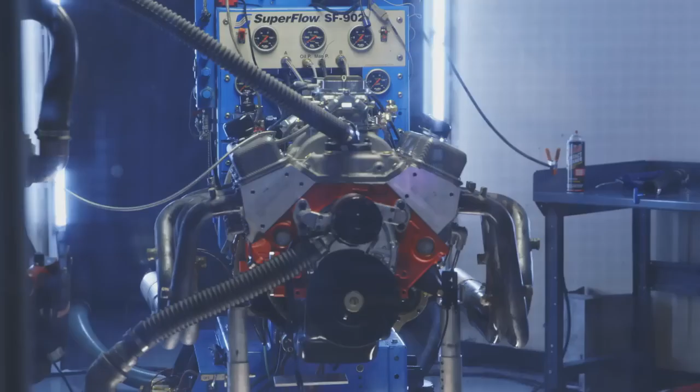We are going full Bill Nye Science Guy. You see, here's what we've noticed in all our dyno testing. When you raise an engine's coolant temperature, it kills horsepower. And you may wonder why. We certainly did, and we think it's not the reason that you probably suspect, and that's what we're gonna find out here. So that'll be test one.

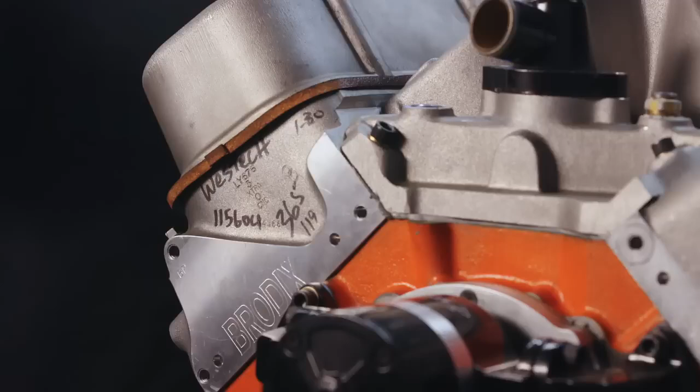Now, the other two things that we're gonna do is attempt heating up this intake manifold like crazy, see what that does as far as the temperature of the airflow, and lastly, we're gonna try and blast some heat directly down the carburetor and see what that does so that you can really judge, does a cooling system make horsepower? Does a cold air intake system make horsepower? We'll find out.

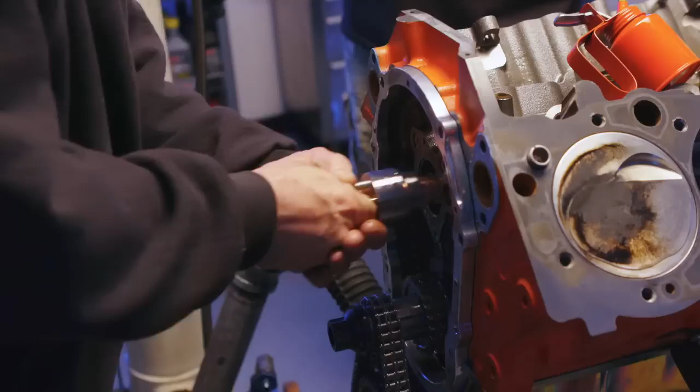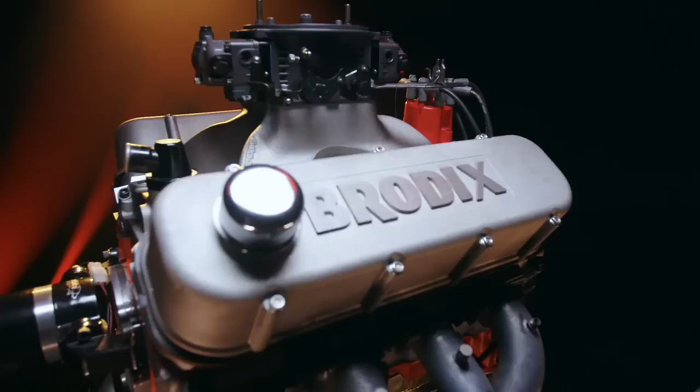And our victim is 598 cubic inches of whopping big block Chevrolet. You saw this in a prior episode called 598 cubic inches of horsepower versus torque. Well, this is the horsepower configuration. The bottom end is a Blueprint Engines crate motor, just a short block at 598 cubic inches. The top end is Brodix 365 oval ports that are all CNC'd.

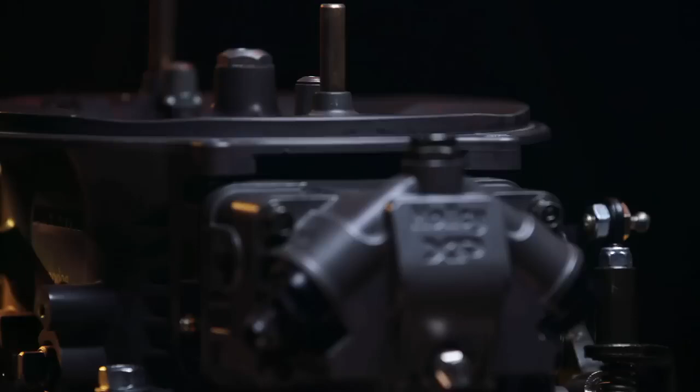This is killer. It's got a big hand port-matched Brodix intake manifold and 1250 CFM of Holley Dominator. It's also got a pretty big solid roller camshaft. This thing is stout. The reason we chose such a big engine is that we think we're gonna see some really big changes because of the combustion chamber volume. But you never know until you find out, and the way we find out is by rolling this thing on the dyno. We're gonna fire it up and start making power before we start killing power.

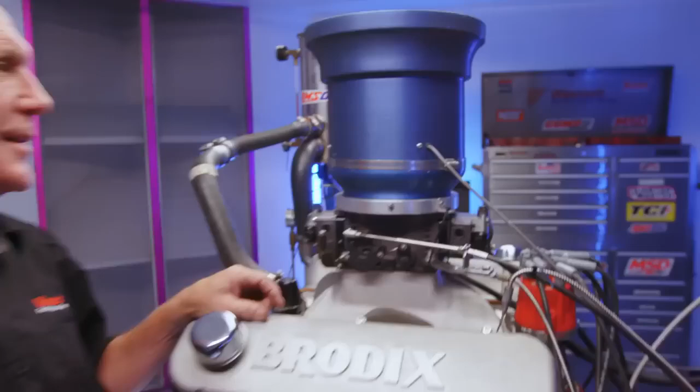So what we've added sensor-wise in addition to our normal stuff for this test was an air hat which will measure CFM. We have an air temperature sensor right under the base of the carburetor. We have another air temperature sensor only about 6 inches away so we can see if there's a temperature change from the base of the carburetor to the inlet port. We also added an EGT, exhaust gas temperature sensor, so we can see if the exhaust gas temperatures change between running it hot and cold. Like the old saying goes, you can't have too much data, but the important thing is to have the right data that you need.

This is kind of a weird test, dudes. What do you mean? Well, I'm trying to answer a question that nobody has really asked. How does temperature in the coolant and the intake manifold affect performance, and what can you do about it? And we all know that's the way to cheat on the dyno. Not cheating, it's optimizing. Optimizing? Oh, okay, I'm sorry, Steve. I didn't mean to offend you there.

That's right. So I think the first test we're gonna do is run the thing cold coolant temperature and then run it hot coolant temperature and then look at data. We know it's gonna lose power, but I wanna find out why. Well, first of all, it's carbureted. So we're going to see some latent vaporization and temperature drop in the intake manifold, unlike fuel injection where you're seeing kind of this constant air temp throughout the whole intake manifold.

So you and I have bench raced this a lot, so I have to ask Dulcich, why do you think an engine makes less power at heat? Air density. Where? On the induction side of the intake valve. So you think at 190 degrees, the air in the intake manifold is going to be hotter than it would be if the coolant temperature was 125 degrees? I think so. Okay. What do you think?

So Holdener first said it, and then you backed it up, that the air temperature in the intake manifold is not going to change with coolant temperature. And I've thought about that and thought about that and didn't believe it, but I'm sort of coming around to it. But this is the test that's actually, I think, going to prove it. And he's done it before. So I say we just run it. Yeah, it's going to be some pretty interesting stuff, I think.

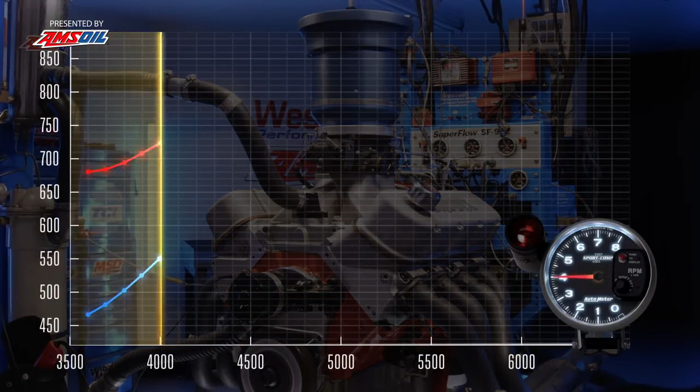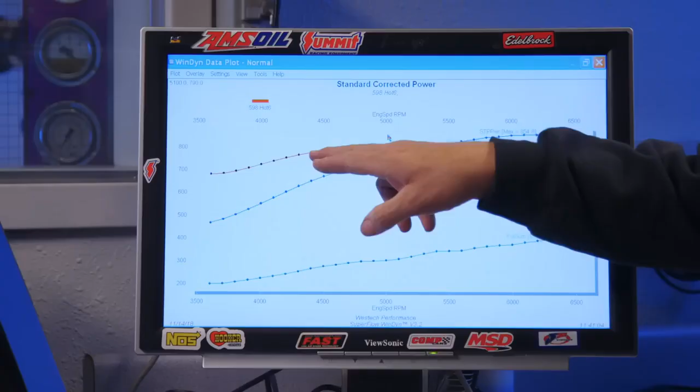Okay, let's have a look at our power peaks and then dive into some of the temperature numbers. Wow, we just made 790 pound-feet of torque, and it made 854.8 horsepower. And look at this thing, it's 700 pound-feet from the hit. Okay, so that's our baseline power number, but let's have a look at what the temperatures are telling us.

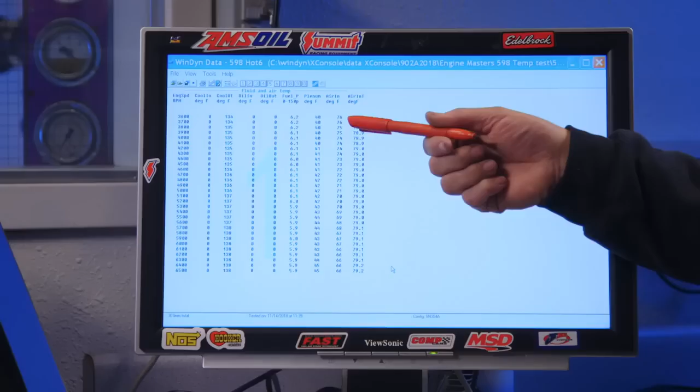The air in the intake runner started at 76, which is really close to room temperature, a little bit less, and then got cooler and cooler and cooler as we went. And it's not affected by wind chill factor. It's reading actual temperature. Well, there's more fuel with more air there, because at idle there's still a lot of air movement and banging around with the air, which causes some heat.

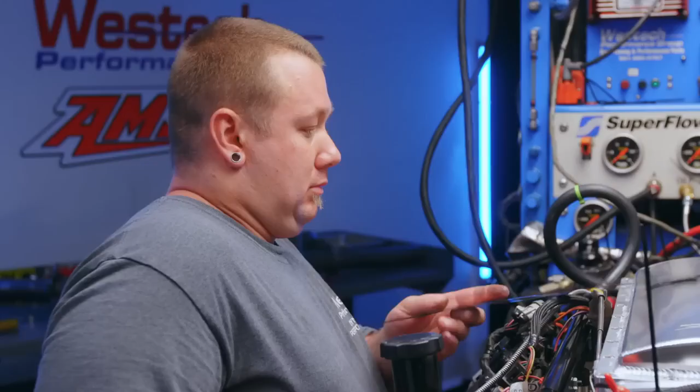And we have to give Troy credit. It's overlap. We're sitting here and Troy goes, what about the overlap at idle? Yeah. Because there's all this, and we both looked at Troy and went, wow. Pork chop for the win.

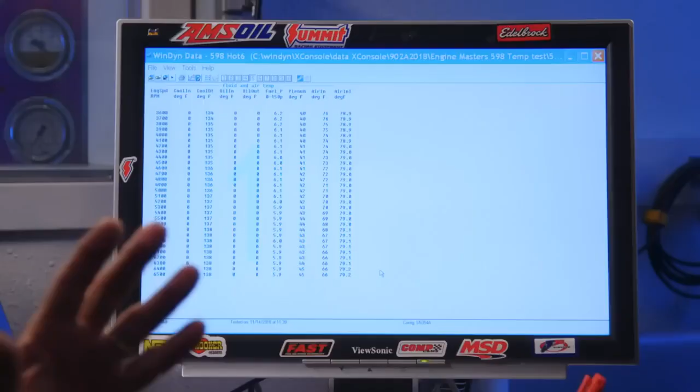So the air during the overlap cycle is coming back up and hitting this sensor. As the engine speed increases, there's less reversion and still the vaporization and cooling. There's still a difference there, and the air does heat up.

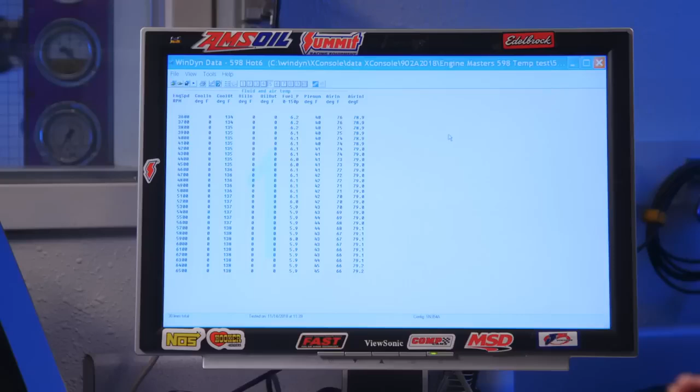So let me summarize. We're looking at the temperatures in the room, under the carburetor, and in the intake runner. In the room, we were looking at 79 degrees. Under the carburetor, while the thing was running wide open at peak horsepower, it was 43 to 44 degrees. And in the runner, we saw 68 degrees. And so it got hotter from underneath the carburetor to the runner.

And our belief in that is because the airspeed is the molecules rubbing into each other and actually causing heat because of friction. So that's sort of the nutshell of what we just decided, right? I'm with you. I agree. And so once again, this is wide open throttle testing. Things would be different at part throttle cruising around. So the next thing to do is to heat this thing up to 200 degrees of coolant temp and see if it gets worse.

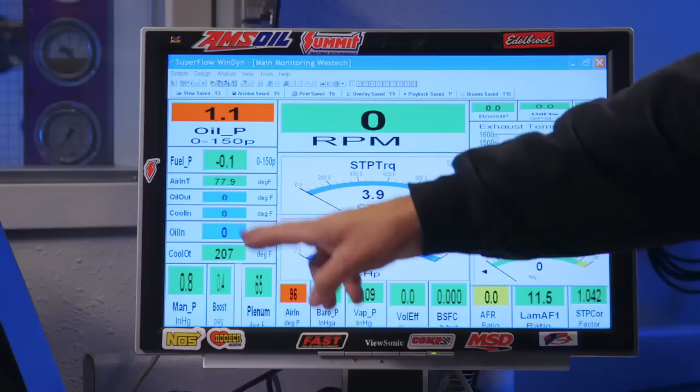Okay, we just spent a bunch of time heating this thing up. We've got it at 207 degrees right now. When we fire it, it'll probably go to 200. Let's see what happens. Moving fast before it cools off.

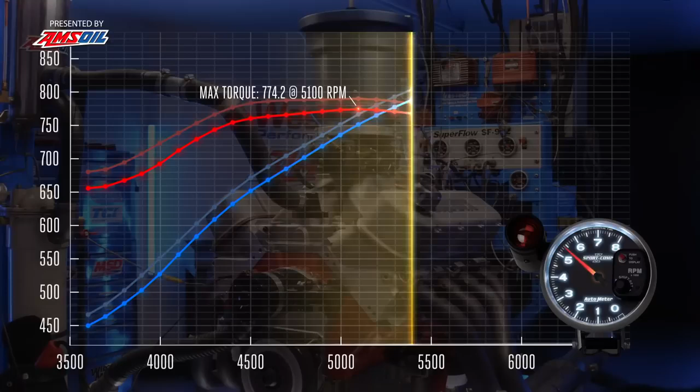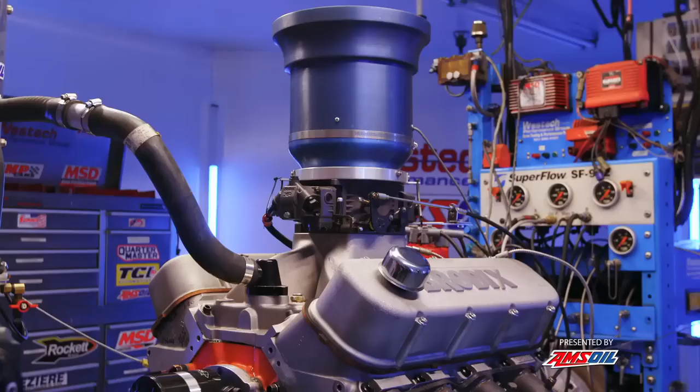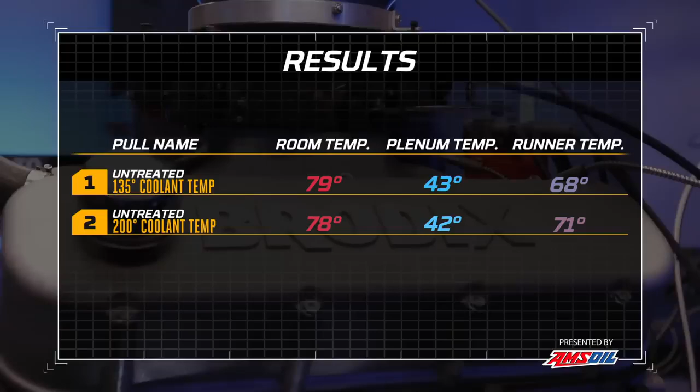Let's start with power numbers. Or lack of. Wow, so it dropped significant power. It went from 790 pound-feet to 774, and we went from 854 horsepower to 836. So let's see what happened with the temperatures though, because now our job is to find out why it loses power. 78 room temperature, the plenum, 42, so that didn't change. And the runner, 71, so that's up 3 degrees for a 65-degree swing.

So I think we can now conclusively say, on an intake manifold like this with no heat crossover, etc., the temperature of the air in the intake manifold really didn't change with the coolant temperature. Vapor lock doesn't happen at wide open throttle. Right. So the next question is, why does it lose 15 plus?

When the combustion chamber temperature goes up, it becomes a higher pressure area, so it can't let as much air in. When the combustion chamber temperature is lower, when the intake valve opens and it's cooler in the combustion chamber, it's now a lower pressure area and will allow more air in. Let's have a look at the CFM to see if that theory holds weight.

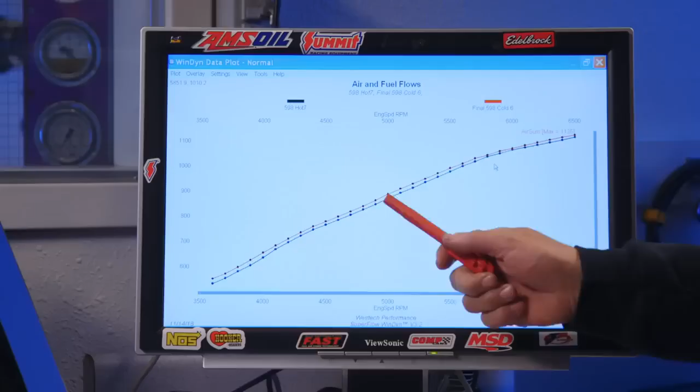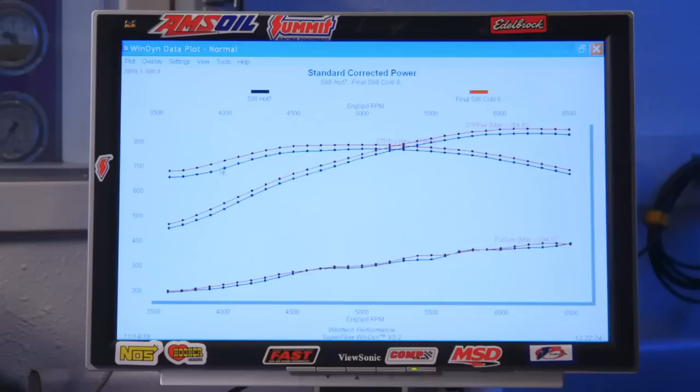Yeah, so in a nutshell, the higher engine coolant temperature indirectly impedes airflow because it raises combustion chamber temperature and static pressure in the chamber, which is going to form a restriction to the airflow. That is our belief at this point with this test. What I'm absolutely sure of is I want hot oil and cold water. Absolutely. Run a cold coolant temperature, hot oil temperature, and now let's move on to some stuff that probably applies to your life a whole lot more.

I want to go heat up the intake manifold with some heat guns and find out what happens when you do that.

I'm gonna take one home to my wife for a hairdryer. She will have no hair left. She will look like you. Oh, that's frightening.

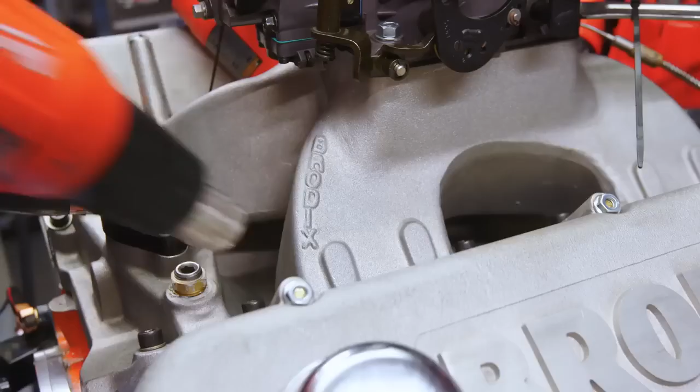In our last test, we found out that the engine coolant temperature didn't have much effect on the air temperature going through the manifold. But what about the manifold itself? We see race guys go through a lot of trouble to keep the intake manifold cool in between rounds, and even the manufacturers design manifolds with divorced runners and heat shields and even special gaskets, all in the name of keeping the manifold cool. Does it really make a difference?

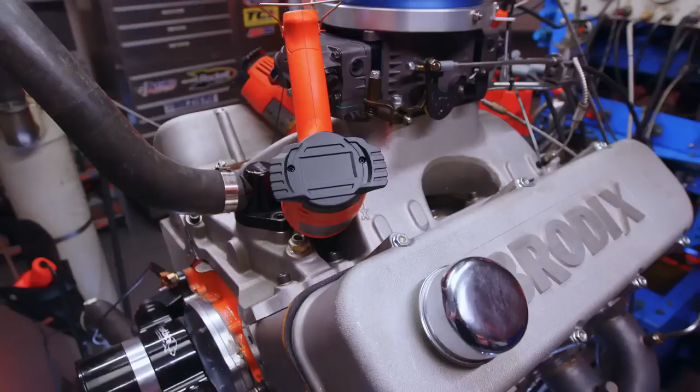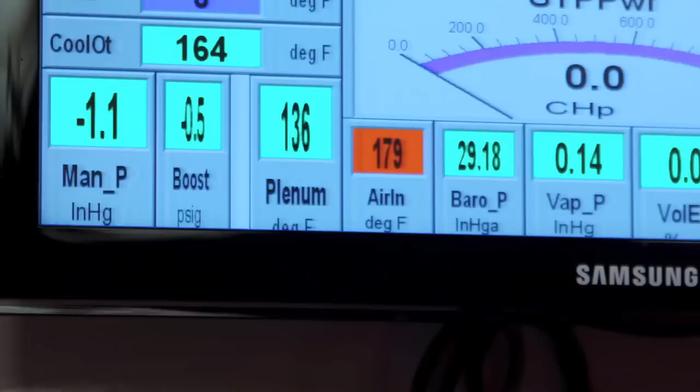We'll find out. These are our temperature sensors. So this is just reading air in the manifold right now. 136 in plenum, 179 in the runner. But let's go look at surface temperatures on that intake. Out here on these surfaces, it's only at about 136. But if you go down under here where the heat guns are all focused, look at that. I've got 268 to 270 degrees.

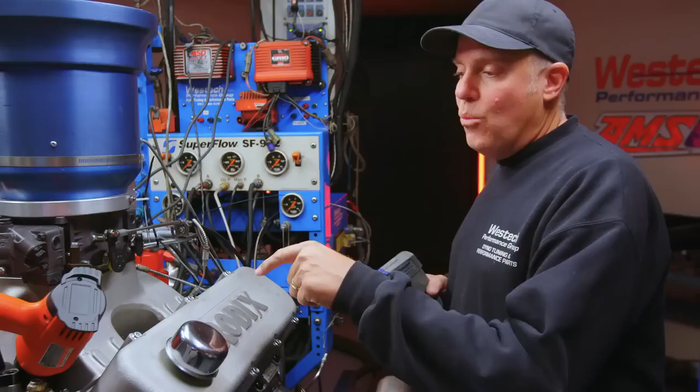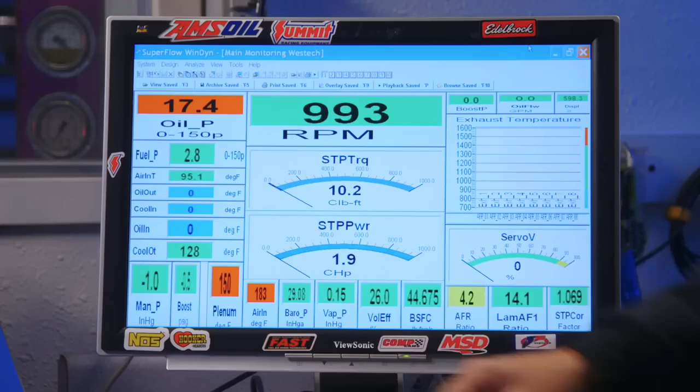We're gonna find out if that affects performance or not, and if it affects the temperature of the air inside the manifold as it's running or not. So now we've isolated it down to nothing but a hot metal surface of the intake manifold. And when it was just parked there, it affected the air inside the manifold. But we're gonna find out what happens when we run it.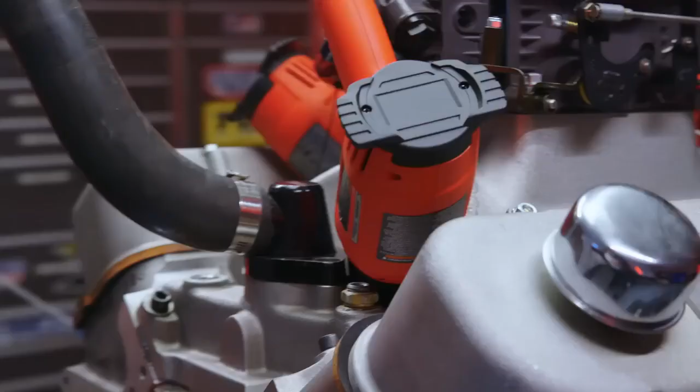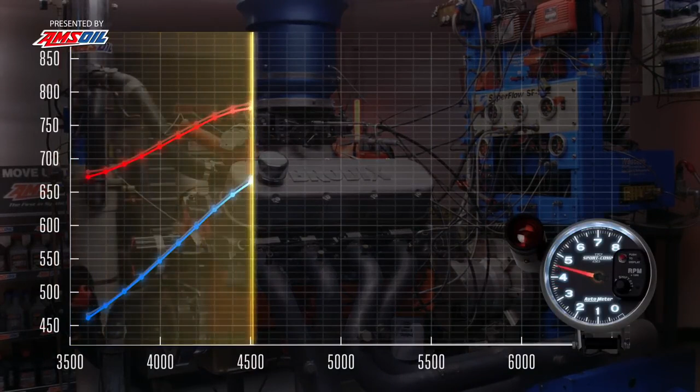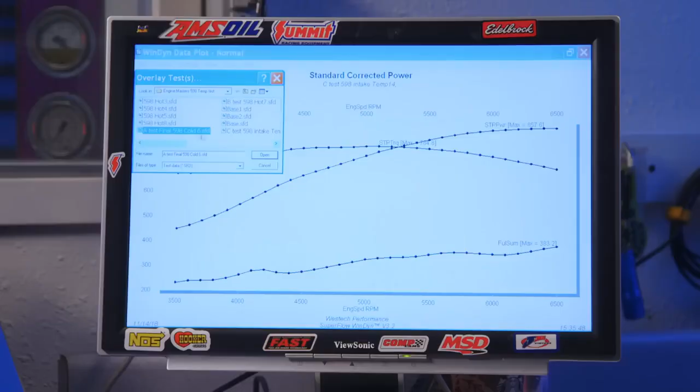Doesn't care, not even a little bit. We got spots on that intake manifold that I measured at 260 degrees plus. Measure it now real quick. Yeah, let me go out there and measure it again and see what we got. All right, Steve, what does it look like we've got? We're within 1 horsepower of our best run. Oh, really? That is incredible. I don't think you'd see that on the drag strip, would you? No.

Okay, I went and measured right after the pull. The part of the valley pan that was 260 plus is now 224. And the part of the runner that was at 230 plus is now 204. So still huge temperature in the metal itself, but it didn't translate into the air at all. You saw the air temperature was just consistently plummeting as we were running the thing, because pretty much as soon as you started the thing rolling, it evacuated the hot air that had heat soaked in there, and it was pulling in the ambient, cooling it through the carburetor, and making just as much power as it did before.

And the air is moving too fast to absorb heat from the hot manifold. Right. The manifold remains hot, but the air is more a function of what your ambient is, because it goes zooming through that manifold so fast. Yep. You know what we have to do next? Go upset every super stock and stock eliminator racer in the nation. Pretty much, and every bracket racer everywhere. Yes. We're gonna go throw ice on it now and see if that even matters.

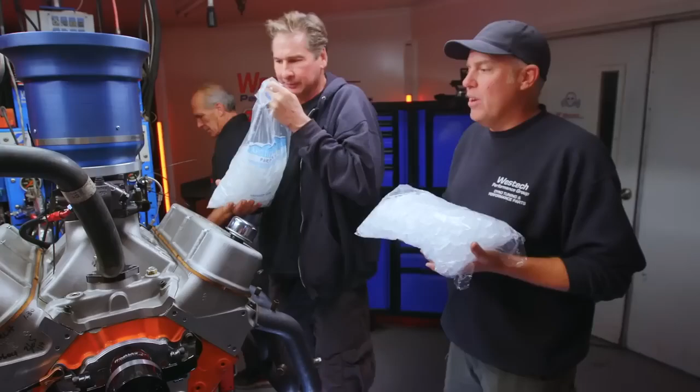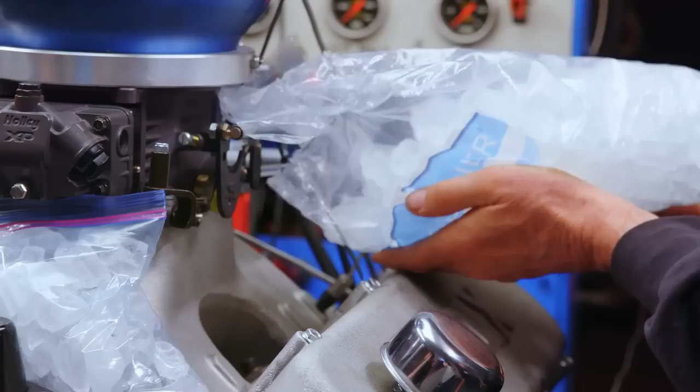Next, we just tried heating up the manifold, and now we're gonna do the thing that so many drag racers do between rounds, ice the intake manifold. Can I just ramrod ice cubes right into there? You think I could just ramrod ice cubes right into the valley pan? You can pour a few, but it's gonna leave water everywhere. See? It'll just look cooler, and it'll cool better. They don't let you do that drag racing. They don't do this, but I still want to get the manifold as cold as we can.

We're already pouring water all over the ground. Are we? Yes. No way. Yes. That's impossible. Yeah, you're right. That was a bad idea. It seems to me as though the ice melted really quickly.

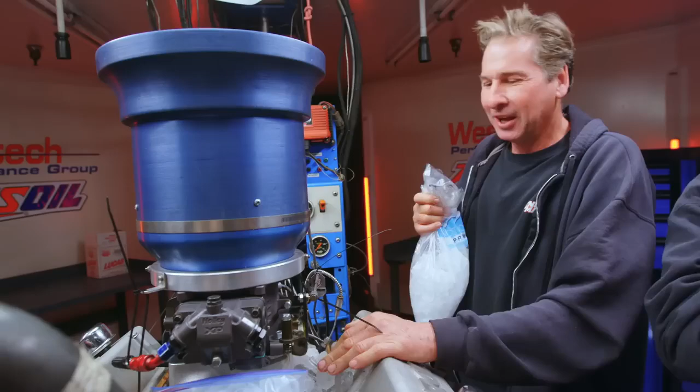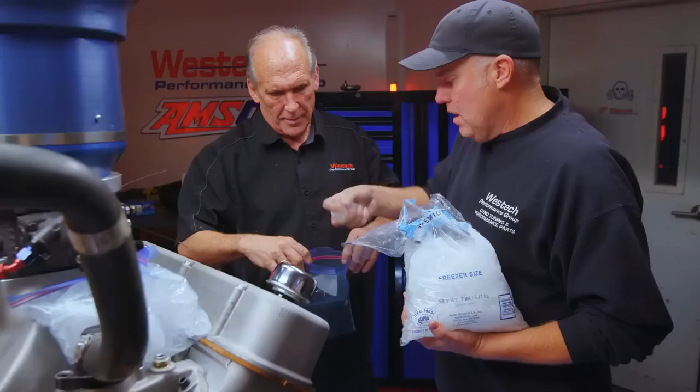I really wanted to stick ice cubes right inside the manifold, but it's making a mess of the dyno floor. So we're gonna abandon that approach and stick with the plastic bags. Hopefully Relay doesn't kick me out. Okay, so we'll be packing this thing with ice, letting it sit, get it as cold as we possibly can, measure it, and fire it up again, find out if it makes a difference. It doesn't make a difference. I've kind of created a little bit of a lake in there with my uncontrolled ice.

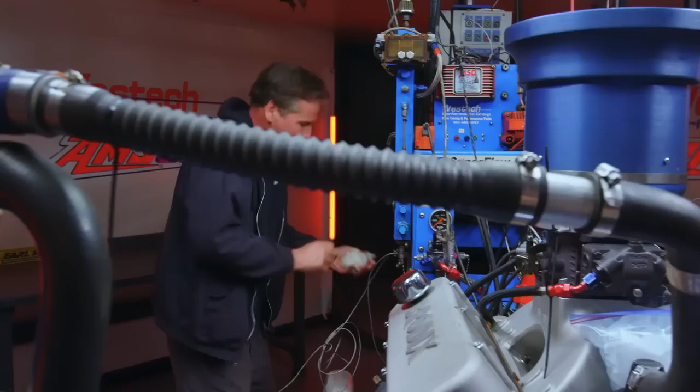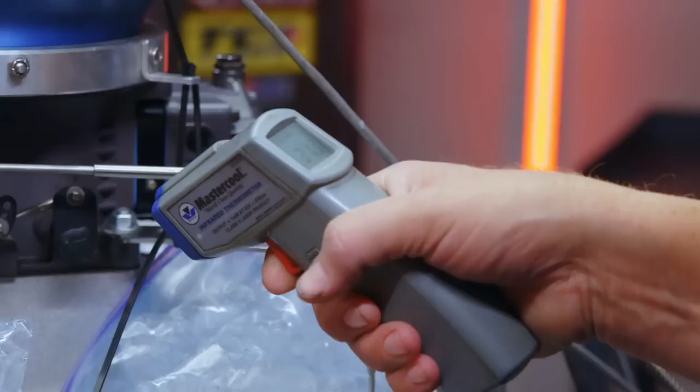We've had this intake packed in ice for about 45 minutes. That's as cold as it is gonna get. Over here we got 34 degrees. That's cold. Let's go find out if it makes any difference at all. Okay, this is gonna be good.

There's nobody at any drag strip anywhere who's gonna get a manifold any colder than that unless it's the dead of winter in New York. Exactly. Or maybe a cold nitrous bottle. Nitrous bottle right up against it might do it. Ice, ice, baby!

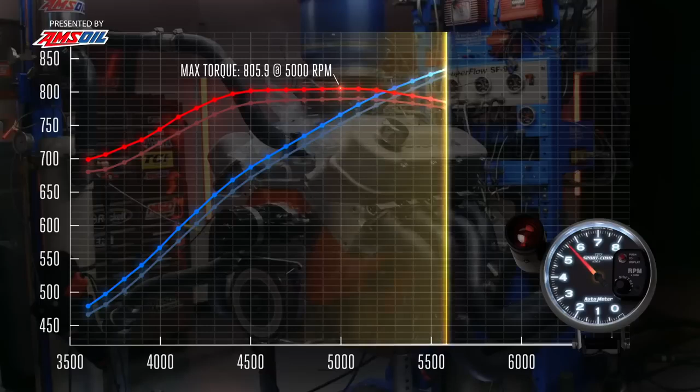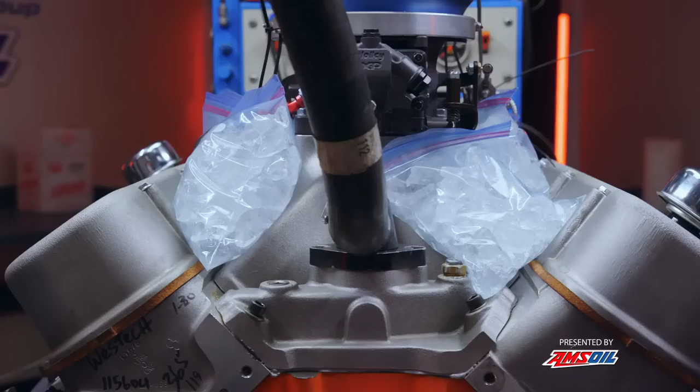I didn't see what the power did, but the air temperature looked a lot colder. It was 40 degrees colder. We just made 805.9 pound-feet of torque and 861 horsepower and more power at every point in the curve. That's crazy. I apologize to all the stock and super stock racers I've offended. Right. That is absolutely the correct thing to do. That's amazing. Once again, look how the gap narrows as it gets up here.

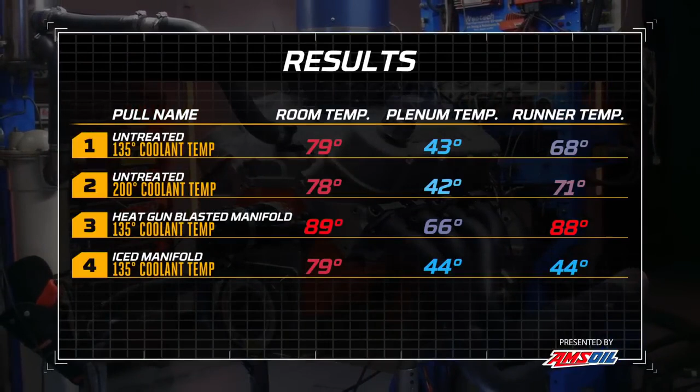How is it that the manifold imparts cooling to the air in the manifold, but not heat to the air in the manifold? You know what? Move more CFM too. Let's look at the air temp. Before we were looking at 68 or 88 degrees in the intake manifold. And here we're looking at 44 degrees right under the carburetor and 44 in the runner. It killed 40 degrees out of the manifold air temperature in the runner.

I have no idea. It made more power. How do you explain that when the cold manifold works but the hot manifold doesn't? It's perplexing. Is it because the gasoline's colder? Well, the air temperature in the plenum was 40 degrees colder. Not in the plenum, in the runner. The runner was colder and the plenum was colder too. We'll have to look at these temperatures. We have to do some number crunching here. Yeah.

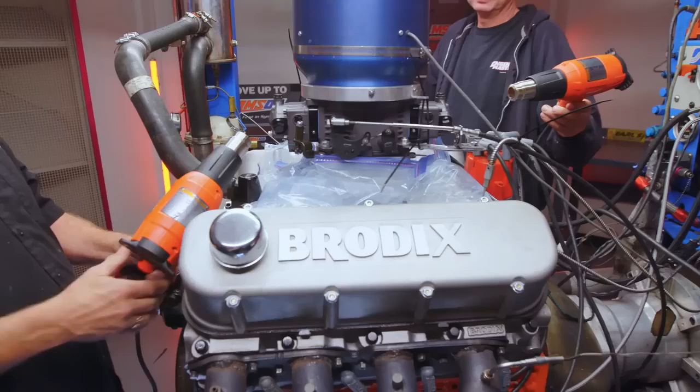Here's what's blowing our minds right now. When we heated up the intake manifold, it didn't seem to make a difference in power, even though the heat came up inside the manifold just a little bit on the air temp. When we chilled the manifold, it made tons of power, and it did chill the air inside the manifold. So we couldn't get our minds around why the air was not sucking heat out of the manifold, but the manifold was sucking heat out of the air when it was cold. It just doesn't make sense.

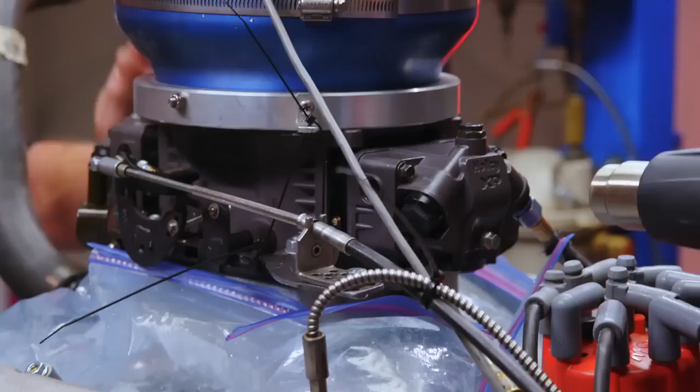So we called our physicist buddy, Billy Godbold at Comp Cams, and I'm actually kind of proud that I think I kind of stumbled into it. I just pat myself on the back there. It happens to be because of the temperature of the fuel, or at least that's our working theory right now. When the manifold was hot, the fuel was hot. When the manifold was cold, the fuel was cold, and a colder droplet takes longer to vaporize, and so it'll pull more heat out of the air because it has more time to do so.

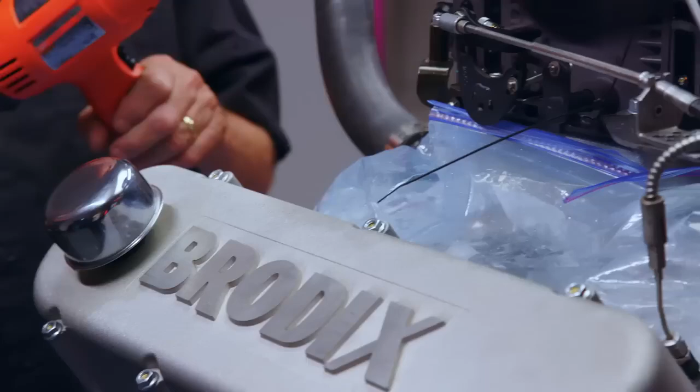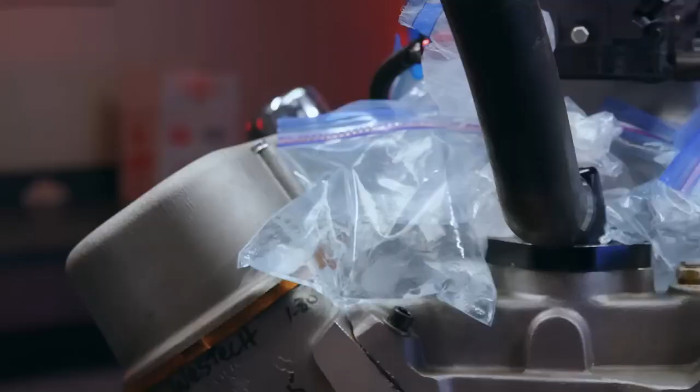And so our next step is a chilled manifold and hot fuel to find out what that does. And once we run that, we're probably gonna be completely confused all over again. That'd be my guess. Ready? Here we go.

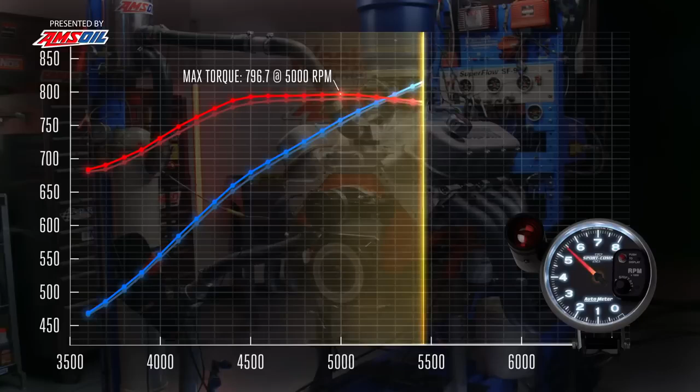Way to think it through, Freiberger. Genius. Not me. The test is just the greatest. Wow. So it is not the air that matters, it's the fuel. Well, the transfer is not from the manifold wall to the airstream. Right. The difference in temperature is because of the starting point of fuel temperature, which we now know is a result of manifold temperature as it moves its way up into the carburetor.

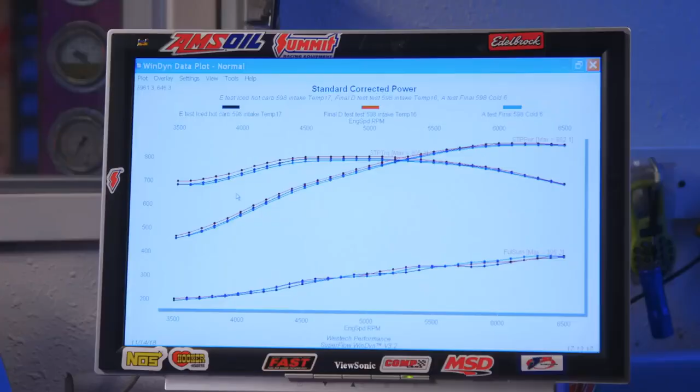We've made that carburetor scorching hot. What did we just learn here? Well, compared to the test this morning, unchilled manifold, it's the same, basically within a couple horsepower repeatability. So the carburetor temperature is the operative factor here, and the temperature of the manifold is not as significant. Exactly.

What I also wonder is if the colder manifold keeps the fuel cooler longer as it enters the intake, even if it's more ambient. Right. The manifold itself is keeping the fuel cool, not so much taking heat out of the air. Right. Basically, heating the carburetor took all the advantage out of cooling the intake manifold. So the carburetor was more important than the intake to be cold. Yeah, and all those guys that used to run the old Moroso cool cans? I scoffed at that. I did too.

I figured it was good to prevent vapor lock. Yeah, me too. I thought, how's that gonna add power? But those guys would have done it for a reason, and it makes sense now. Old is new again. Yeah. We probably just discovered something that people have known for, man, 40 years. We can make a fortune with a fuel cooler. Oh no, they've had that already.

Wow. What an education. It's been a roller coaster today. It really has. Really cool. We've made some misstatements along the way, but the physics of it all added up. Every time we got our head around it, you start looking at all the data and you're like, of course, it adds up.

You know the bump in the road? We do all this testing again on a fuel injected manifold, it's totally different results, because there's no fuel in the air. Yep. Well, I think we can derive nothing. I know nothing. At this point, I'm not going to assume or pretend to know anything. This was a fun day.

Okay, Dulcich, it's on us to go out there and try and take all of this and explain it in 30 seconds to make some sense so that we can apply it to our lives. Oh, no problem, man. I've got it all up here.

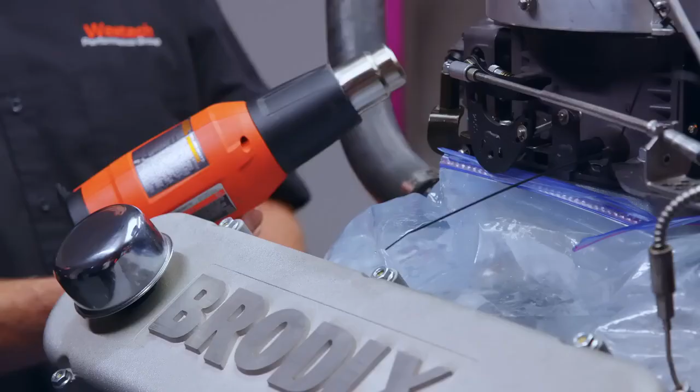That moves on to the next tests. We couldn't understand how, when the manifold is hot, it doesn't impart heat to the air, but when the manifold's cold, it pulls heat out of the air. Mind blown. So we did a lot of research, talked to Billy Godbold, and ultimately ran the cold manifold with a hot carburetor, which answered virtually everything: cold fuel is more important than a cold intake manifold. The fuel has a greater heat draw out of the intake charge than the manifold's ability to pull temperature out of the air. So icing the manifold isn't the key, icing the carburetor is the key.

And that's what happened when we were testing. We were blowing super hot air at the manifold, not at the carburetor, but all of that heat was radiated right up here. So it's amazing. Cold fuel makes power, hot fuel, not so much. But on EFI, it could be a completely different story because there's no fuel in the manifold. Maybe we need to test that next time, right here on a future episode of Engine Masters.